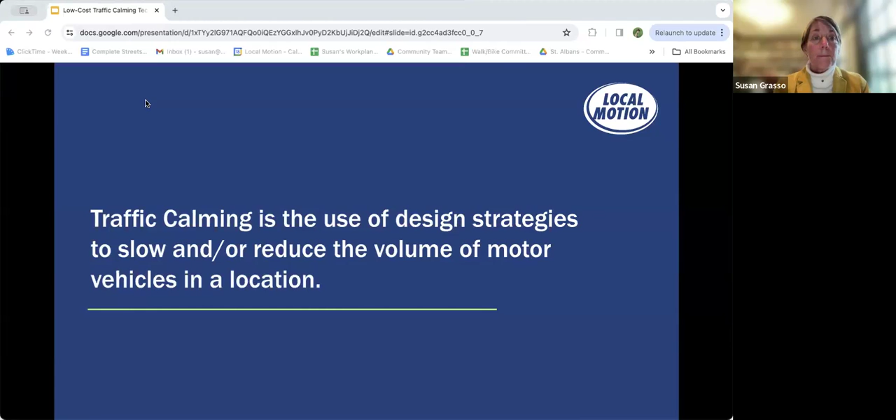So here's our definition of traffic calming. Traffic calming is the use of design strategies to slow and/or reduce the volume of motor vehicles in a location. When successful, traffic calming brings many benefits, which can include improved safety and quality of place, increased use of walking, biking, and rolling, greater economic activity, and reduced demand for enforcement.

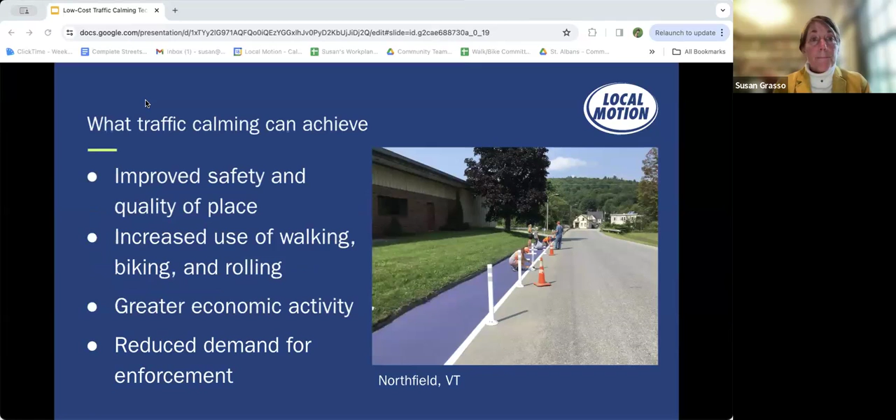The last word used in our definition was location. So where is traffic calming appropriate? Essentially, it's appropriate anywhere that the current design of the street or road is inducing drivers to go faster than is appropriate for the context.

So common points where traffic calming is needed are transition zones between rural and urban areas, or transitions between rural areas and village centers. Also within village centers, around schools, on neighborhood streets, on rural roads used by people walking and biking, and at crosswalks and intersections. Now that we've established what traffic calming is and what it can achieve, we're going to learn more about the things we're trying to change, which is driver behavior and speed.

So I think a major point of this webinar is don't blame the human, blame the design. The speed at which people drive is mostly determined by cues that we take from the roadway and the surrounding context. That includes things like the width of the road overall and the lane widths, how close buildings and trees are to the road, how intersections are designed, and more. Generally, straight and wide designs send drivers signals that high speeds are okay, while narrow, more constricted designs will signal to drivers that they need to go slower.

So no doubt about it, there are reckless drivers. But when most drivers are going above the speed limit, that's not an indication that something is wrong with the humans driving. It's an indication that the design of the road is giving those drivers cues that are not aligned with the surrounding context and how fast we want cars going. Education and public service announcements have a very limited real effect in and of themselves.

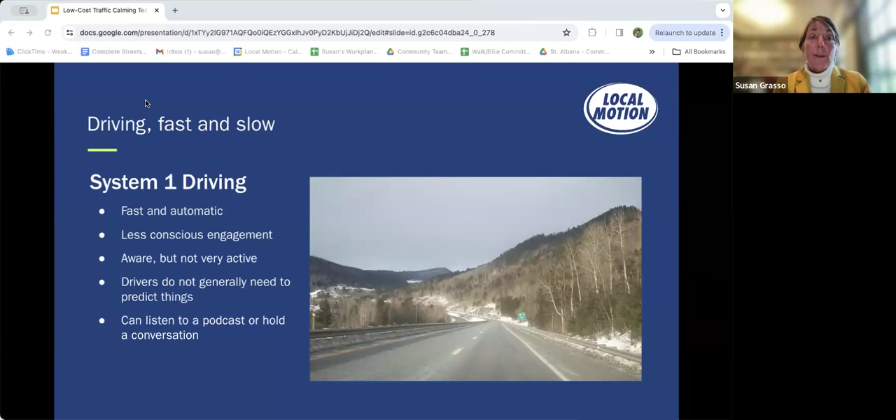So we can think about driving as toggling between these two systems. When it comes to driving, which system we are in is largely determined by our perception of risk. In simplified contexts, like a highway, motorists are more likely to perceive less risk and apply system 1 thinking to their driving decisions. In this context, we can have a good conversation with someone else in the car, we can listen to a podcast, etc. Our body and mind are performing the operation of driving in a relatively subconscious way, and so we can do other things at the same time. This is generally safe when we're in a simplified environment where we don't need to do things like predict what other road users are going to do.

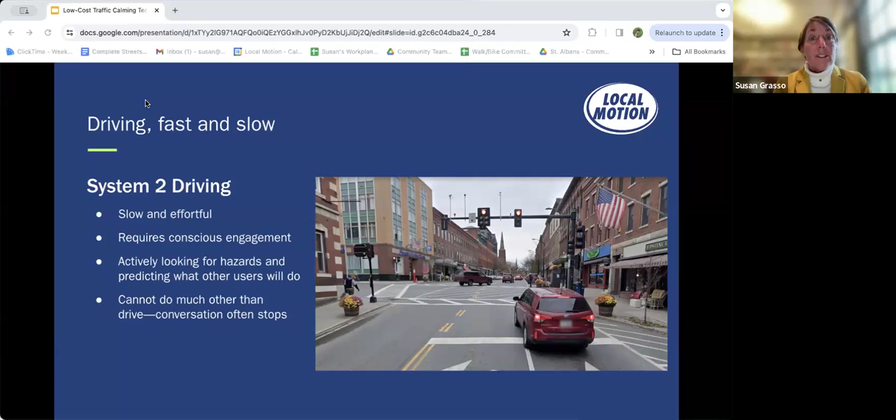System 2 driving is engaged when we perceive a higher level of risk in our environment. This engages drivers in a more slow and effortful mode of operation, in which they are more actively looking for hazards and predicting what others might do. So in this mode, you usually can't do much more than drive. Conversation will often stop. You might turn down the music or podcast to focus on driving. You become more focused.

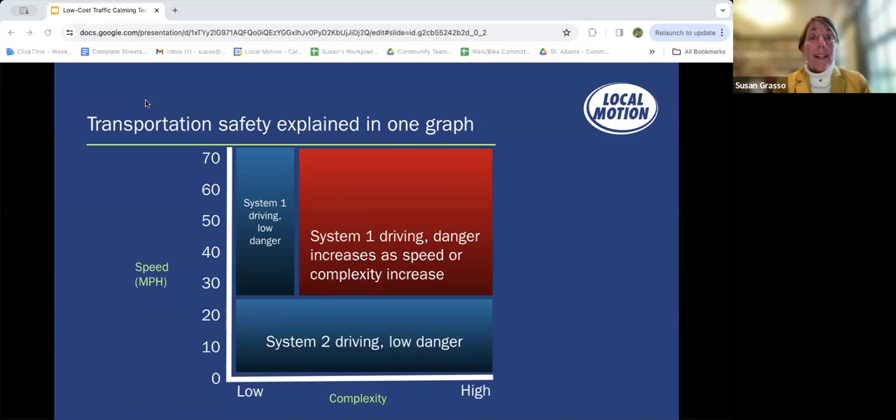So this graph applies system 1 and system 2 driving to give us a framework through which we can understand the interaction between car speeds and the surrounding environment and how this contributes to danger or safety. Speed is on the y-axis. An environment in which cars are moving at a high speed is not necessarily dangerous in and of itself. Complexity is on the x-axis. An environment in which there's a great deal of complexity and unpredictability, like a parking lot or a downtown street, is also not necessarily dangerous in and of itself.

Roads are high-speed, low-complexity environments. The design of the road is simplified to make driving at higher speeds safer. There are few intersections, and at highway speeds, people outside of cars are usually not allowed. Drivers operate in System 1 in this kind of environment, and it's relatively safe.

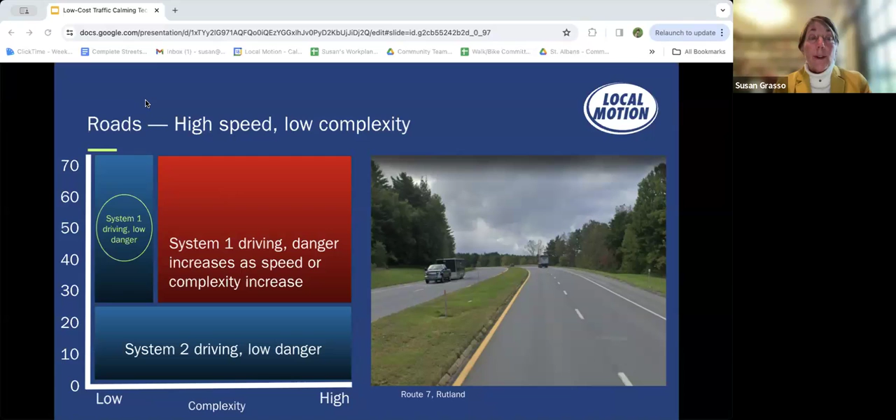Streets are platforms for a community to exist and create social and economic prosperity. This is an environment with a lot of complexity where people are crossing the street, trucks are stopping to make deliveries, maybe there's trash pickup happening. The design of a street signals to drivers that they need to pay attention and go slowly, which puts them into System 2. This again is relatively safe.

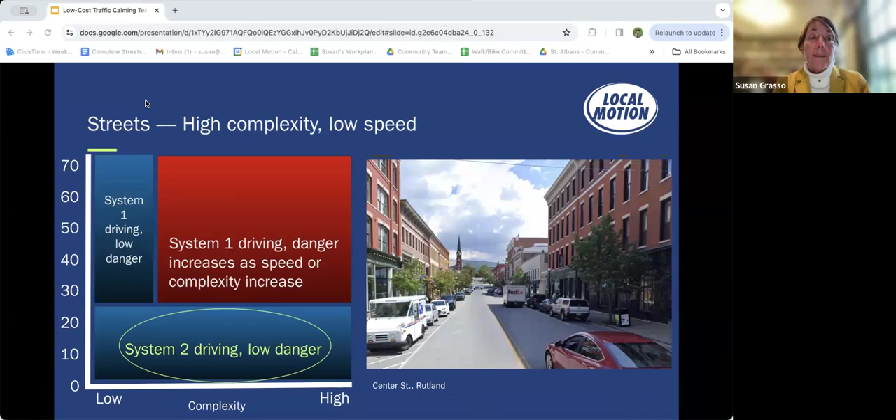A STROAD mixes design elements from both roads and streets. These areas are often wide and straight with many lanes. Development is usually set back from the road, and yet there's complexity resulting from the development, which requires driveways and intersections, and there are sometimes people walking and biking.

So in a STROAD environment, the road-esque design puts drivers into System 1 and encourages higher speeds, but the development introduces elements of complexity that result in danger when mixed with that speed. A STROAD does not have to be in a suburban area, and you can have sections or even intersections in downtowns or village centers that are more STROAD-like. These are often areas that require traffic calming.

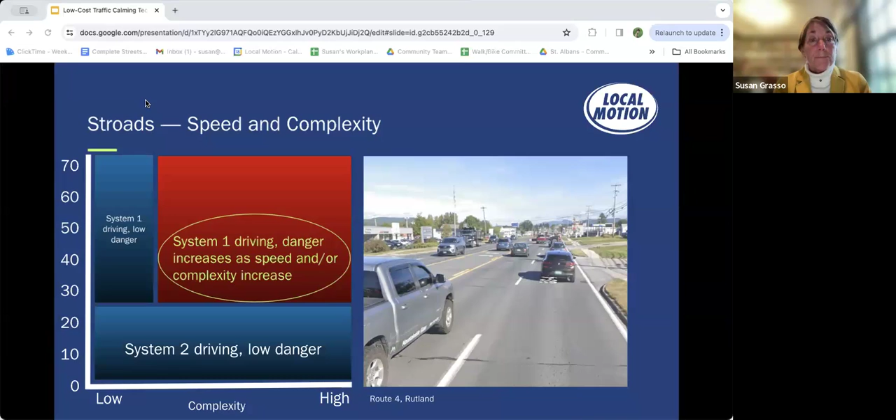So effective traffic calming is essentially about recognizing the points where the design of the roadway is cueing drivers to be in System 1, and then changing design factors to switch the drivers into System 2.

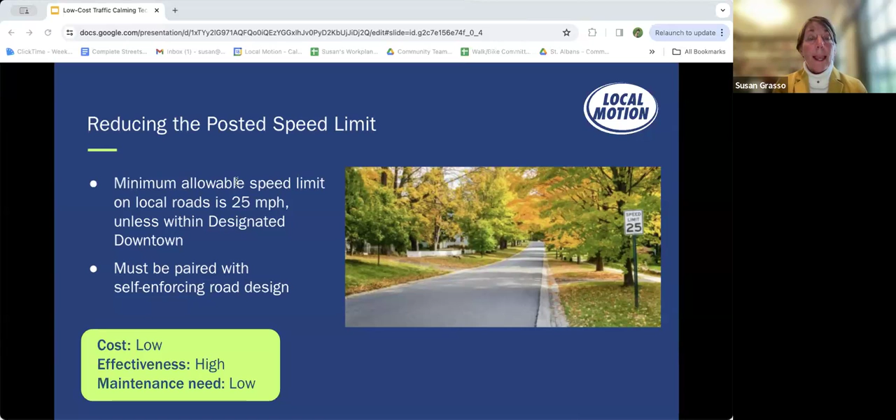So a speed feedback sign is like a speed limit sign, but on steroids. These signs have built-in technology to indicate to drivers how fast they're going, or in some cases, simply tell them that they're going too fast. So speed radar signs can be installed either as portable units or permanently placed. But either way, they're pretty expensive.

They are, though, very effective as they can reduce speeds between 5 to 7 miles per hour in the area near the sign. They do need a power source and regular maintenance to keep them in good working order. Plus, a potential downside is that motorists can become immune to them if they don't feel a risk of enforcement. So you might want to pair this treatment with some intermittent police presence.

Next up is a strategy known as centerline removal. So that ubiquitous double yellow line on our streets and roads may actually encourage people to drive faster. There hasn't been a lot of research done on this yet, but preliminary research indicates that in certain situations, removing the center line can reduce traffic speed. Speed reductions between 5 to 7 miles per hour are possible.

The explanation for the observed traffic calming effect is the addition of an element of uncertainty, which is thought to naturally reduce speeds. Drivers come upon a situation like that and are sort of surprised not to have that double yellow line present, which causes them to pay more attention and slow down. With striping, motorists feel more confident about where their space is, triggering that system one, more automatic pilot driving style, which again manifests itself in increased speeds.

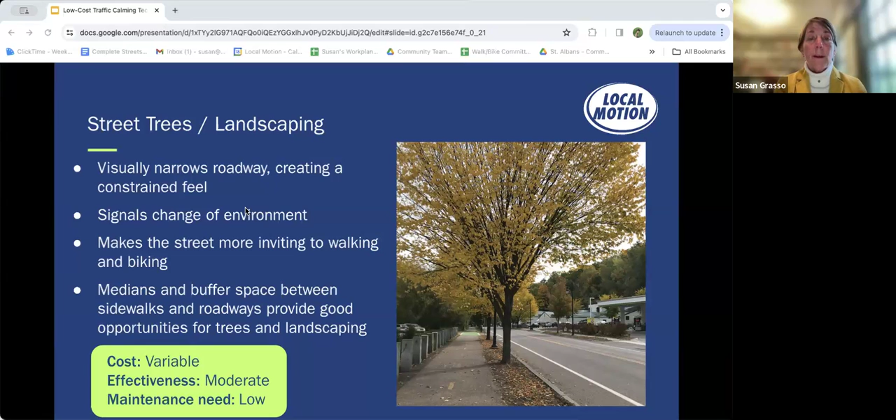Not much is known about how effective this strategy is for traffic calming alone. It's usually recommended to be a part of a more comprehensive traffic calming program. The example shown here is from Burlington on Riverside Avenue.

Next up, we have edge lane roads. These are also called advisory shoulders or advisory lanes. With an edge lane road, the car lanes are combined into a shared center lane, ranging from as little as 10 feet up to about 18 feet in width. This creates usable shoulders for people walking and biking on roads that would otherwise be too narrow to accommodate that use. When drivers encounter each other, they shift into the edge lanes to pass as needed. And if people are walking or biking in the edge lane, drivers must yield to them. All of this contributes to a calmer and safer road that accommodates people driving, walking, and biking.

Edge lane roads are appropriate for low volume roads with low to moderate speeds up to about 35 miles per hour. While they're common in Europe, they're currently not approved for use in the United States, while the Federal Highway Administration evaluates safety data from an experimental study. We're hoping this treatment is approved for use soon because we see a lot of potential for this strategy on our rural roads here in Vermont.

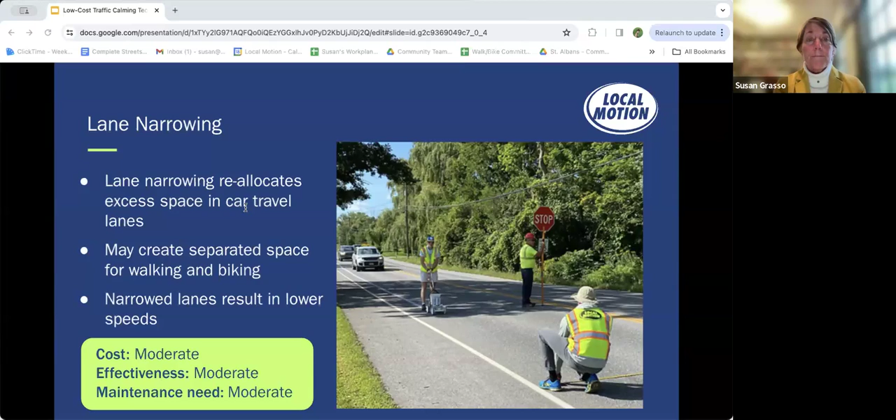So in contrast to lane narrowing, lane reduction is about reducing the actual number of car travel lanes on a multi-lane road. This treatment is often referred to as a road diet, most typically converting 4 travel lanes to 3, which provides a travel lane in each direction plus a center turn lane. The extra space no longer needed for the 4th lane can be used to create bike lanes or shoulders.

These 4 to 3 lane conversions have been shown to be very effective, reducing speeds by about 5 miles per hour and reducing crashes by something like 40 to 50%. They can also be relatively inexpensive if the conversion is accomplished using pavement markings within the existing public right-of-way. We also recommend that when these conversions are considered, that they be paired with lane narrowing to increase their effectiveness.

The need for turning lanes should also be given serious consideration based on all users of the road, not just motorists, because they create uncomfortable and unpleasant conditions for people at street crossings, including longer crossing distances and the loss of bike lanes approaching intersections. The occasional pauses that drivers must make to accommodate turning vehicles can create positive friction in traffic flow, helping to keep speeding in check. On streets where turning lanes are really necessary, it's important to ensure that intersections or mid-block crossings are designed with pedestrian safety and comfort enhancements, which we're going to talk about in the next section.

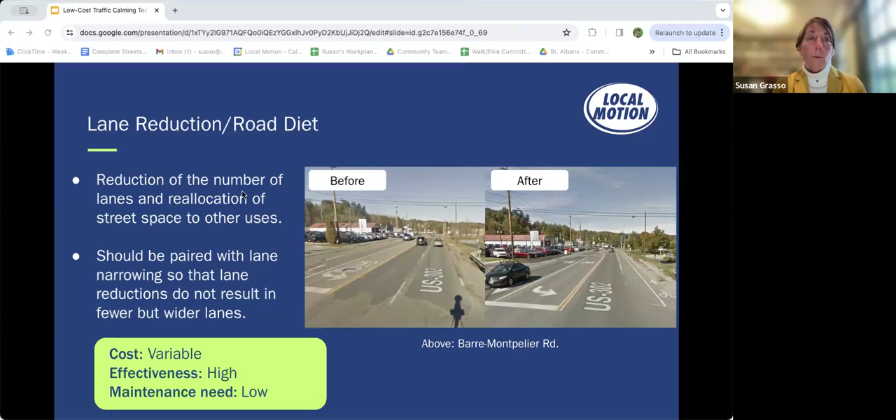So in the next couple of slides, we're going to look at treatments that involve the shoulder space. Bike lanes can help calm traffic when they're coupled with a reduction in lane widths or number of lanes for motor vehicles. And the presence of people in the bike lane also helps to slow traffic. So there's a safety in numbers effect at play here as well.

Protected bike lanes provide additional separation between people biking and driving, often by using delineator posts or concrete curbing. These types of bike lanes are more likely to slow traffic because of the presence of physical barriers alongside the travel lane. Reductions of speed from 8 to 16% can be expected depending on the application. Bike lane width should be about 5 feet or even 6 feet to appeal to all ages and abilities, with a preferred buffer width of 3 feet or more for vertical protection.

The cost to create a protected bike lane is much less than the cost to create an off-road shared use path, and much easier if it is placed in the public right-of-way, but it can still be pricey if the length of the corridor is very long. In addition, there are maintenance concerns that have to be addressed for protected bike lanes. Delineator posts are often removed to allow for easier winter plowing, and where protection is provided year-round, accommodations need to be made to ensure that the bike lane is plowed in the winter and otherwise swept clean of debris, and this could require the use of special equipment.

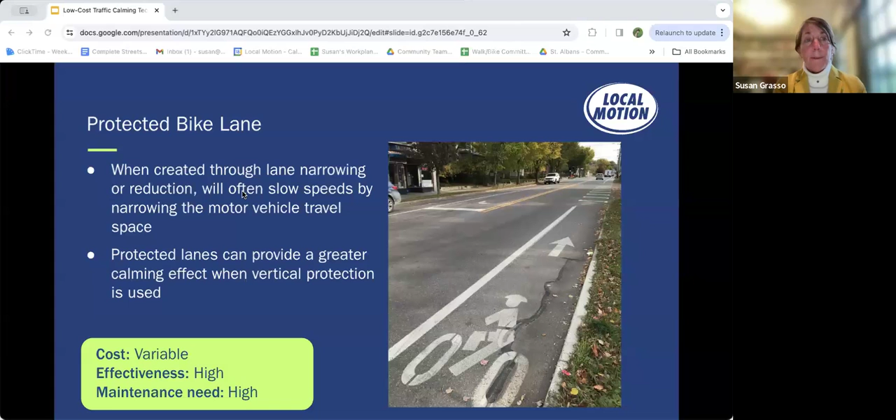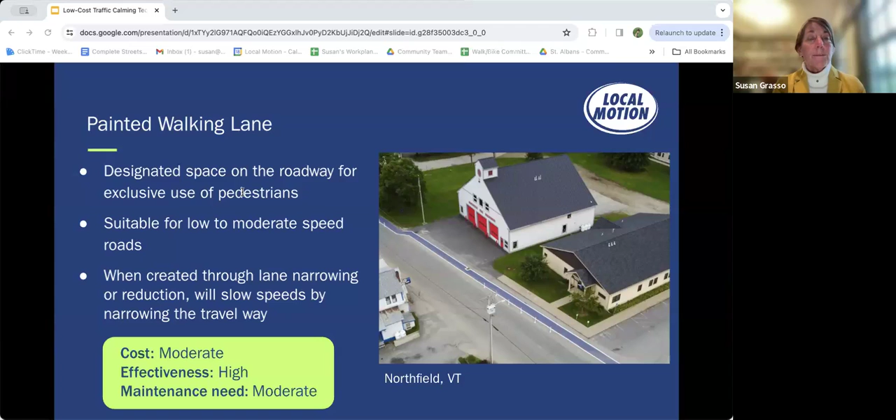Shoulder widening is often considered in rural areas as a way to make space for people walking and biking in an otherwise too narrow roadway. This requires the addition of new pavement at the sides of the road to create a wider overall cross-section, as opposed to lane narrowing, which repurposes existing pavement to create wider shoulders for walking and biking. In Vermont, paved road shoulders are considered bike lanes, even if unmarked, and they can also be used by pedestrians if sidewalks are not present.

Rumble strips and/or contrasting or colored pavement materials along especially dangerous sections of the road could be considered with shoulder widening to reduce the risk of roadway departure of motor vehicles. The downside to shoulder widening is that because the roadway is getting wider overall, it can result in higher speeds. So that's a trade-off, but sometimes, creating that separated space for walking and biking is worth that trade-off.

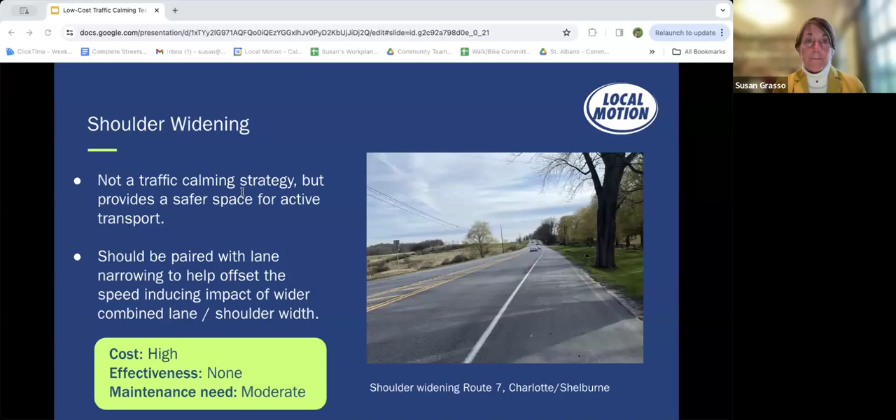Next up are side paths. These are two-way protected bike lanes on one side of the road that create a bidirectional shared use path. Side paths can offer a very low stress experience as compared to traditional bike lanes because they usually provide for more separation and protection. This treatment also very efficiently uses space because it requires only one buffer, which also helps to reduce the cost. It's especially cost effective if a side path can be created on existing pavement.

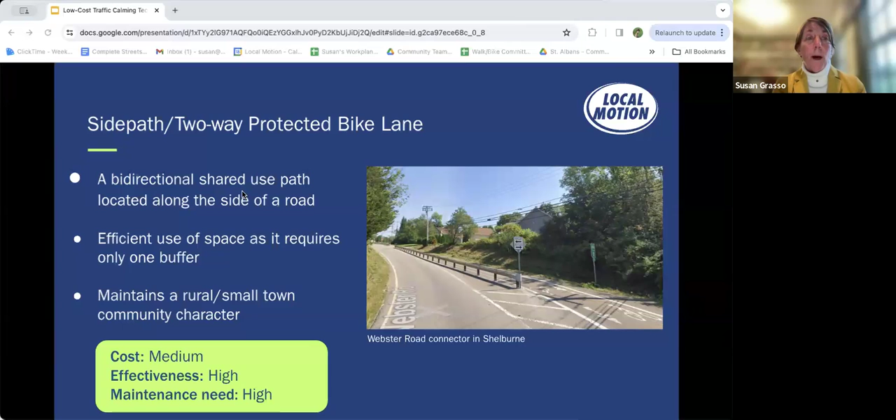So speed tables are asphalt or rubber mounds with flattened tops that cover the full width of the roadway. The flat top is typically long enough for the entire wheelbase of a passenger car to rest on, so they're quite different from speed humps or bumps. Raised crosswalks are similar, except that they are placed at pedestrian crossings, simultaneously slowing speeds and allowing pedestrians to be more easily seen. Speed tables should be considered more of a corridor treatment and raised crosswalks more of an intersection treatment, but we've combined them here because of their similar design and impact on speed.

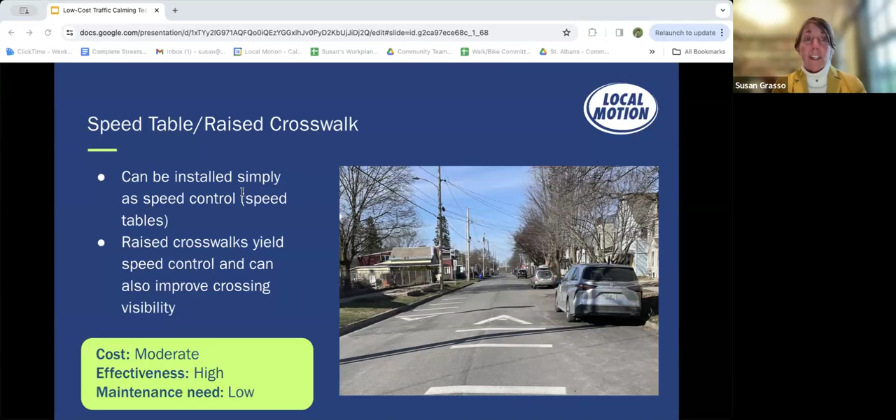Both treatments slow vehicles down because they vertically displace them, and they are both quite effective with speed reductions of up to 10 miles per hour possible. Speed tables and raised crosswalks are commonly preferred over speed humps because they are less disruptive to motor vehicles, especially emergency vehicles.

So next up are community gateways. These are landscaped sign installations that announce to motorists that they're leaving a rural area and entering a community where land use, pedestrian use, and motor vehicle activities will be more intense. Gateway signs should be placed in areas where a reduction in speed is desired. Some data suggests that average speed reductions of about 5 miles per hour can be associated with this treatment. Gateway signs also can align with community development goals to highlight a sense of place.

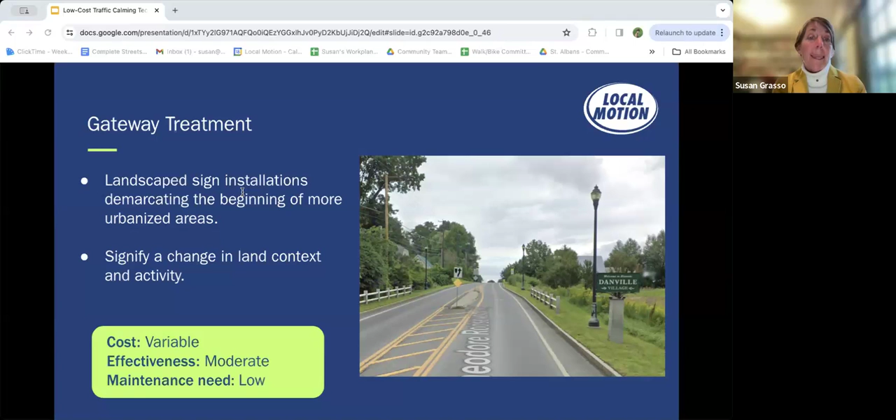The example shown here is from Danville. In this case, the gateway treatment is combined with other vertical elements like the light post and fencing and lane narrowing by pavement markings to cue the driver that the road context is changing and that they're entering a settlement of some kind. The cost of this treatment varies greatly depending on how involved the gateway design is and the extent to which other complementary elements are included. Maintenance needs include keeping the sign in good repair and keeping up with associated landscaping and mowing.

And next we have chicanes. Chicanes are designed to convert straight segments of roadway into curved ones by essentially creating staggered curb extensions. They can be installed using curbing or landscaping. They can also be created by alternating parking from side to side, or even by alternating parallel parking and perpendicular parking. Chicanes can be effective at reducing speeds by about 2.5 to 6 miles per hour.

They might be appropriate for some rural main streets, but if there's a high percentage of truck traffic, curb overtopping could be a problem, so that would have to be considered. Communities could also think about installing seasonal chicanes to reduce the maintenance effort associated with winter snow removal. You probably noticed that we've been sharing local examples of the strategies included in this webinar. Jonathan and I are not aware of this treatment strategy having been applied anywhere in Vermont. So if you know of an example of a chicane, we would love to hear about it.

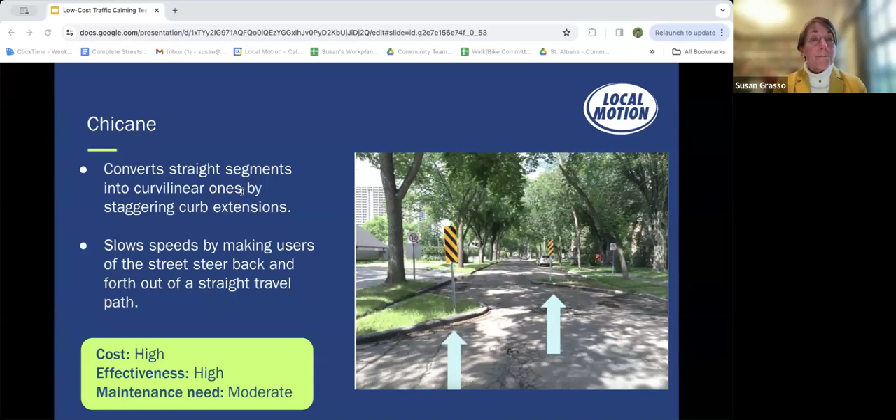So up until now, we've been talking mostly about strategies to reduce speed, but slow-moving traffic at high enough volumes can still create conditions that are uncomfortable and unattractive for riding bikes in mixed traffic. So it's important to think about whether traffic volumes need to be managed too. Using modal filters to create filtered permeability does just that. Filtered permeability is the idea that you can filter out cut-through car traffic on selected streets to create a more attractive environment for walking and biking while maintaining accessibility for residents, deliveries, trash collection, or emergencies. Modal filters are the different ways that you can do that.

When properly applied, this is a great way to provide on-road, low-stress conditions for people walking and biking with no impediments. The potential downside is that it may lead to higher traffic volumes on other roads. This highlights the need for thinking about the road network holistically for all modes of transportation and understanding the purpose of the various roads in your community as you think about effective design changes. Modal filters can be as simple as a barricade sign to gates, bollards, planters, curbs, concrete blocks. Bollards can even be flexible and bend on impact with a motor vehicle, which can allow emergency access.

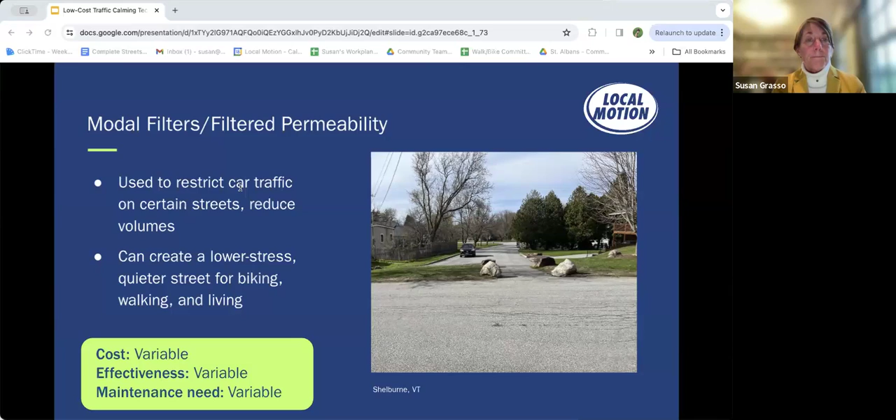In this example, also from Shelburne, large boulders and grass were used to prevent traffic from Shelburne Farms cutting through this neighborhood to access Route 7. People can easily continue to use these residential streets for walking and biking. So that was a mouthful. We're going to pause here for some questions before we move on to treatments for intersections and crossings.

Okay, so Michael, I think there are plans to install chicanes on the Notch this year. That would be awesome. We'll be sure to track that. The new parking design on Archibald Street in Burlington is a kind of chicane. Okay, I'm not familiar with that, but we'll look into that as well.

Thank you. When will Vermont decide if the edge lane was effective and allow it to continue? It's my understanding that the edge lanes were removed from Lincoln, and I'm drawing a blank on the second community where it was tested, but it is still in existence in Burlington. As far as I know, there are no plans to remove it. And I think before we really encourage that strategy to be adopted widely, we're going to have to wait for the Federal Highway Administration to give their approval for that. I hope that answers your question, Christy. Yes, and Lincoln. Yeah, Christy, please share a comment about what you thought about the edge lanes in Lincoln if you had a chance to experience them. Thanks, Paul, for your comment.

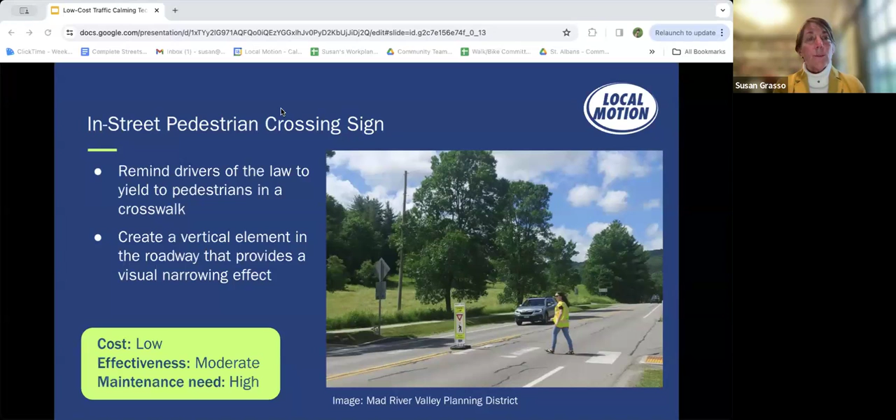So pavement materials. Textured surfaces include the use of materials like brick pavers, cobblestones, or textured concrete to cue motorists that they're in a more people-oriented place that has the potential for pedestrian activity. They're often used in conjunction with other traffic calming elements. So in addition to their visual quality, textured pavements can also generate noise and a physical sensation, causing drivers to slow down. Some studies suggest that speed reductions of up to 9 miles per hour are possible when applying surface treatments like these.

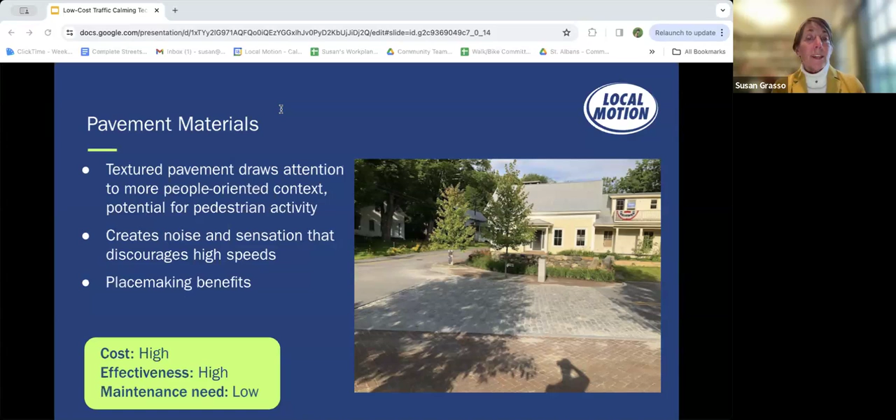In this example shown here from Warren, recovery funds from Hurricane Irene were used to both improve Warren's sense of place and calm traffic using a combination of brick pavers, gray cobblestone, granite curbing and bollards, and landscaping. One consideration with this strategy is how the choice of pavement materials affect comfort, safety, and visibility for people on bikes or people who are using mobility assistance devices. So textured surfaces might be better kept to smaller sections or combined with smoother, more visible surface treatments.

Street art is similar to use of textured pavements, except that the road surface is painted to draw attention to the fact that something about the roadway is changing. It's also used to both encourage slower speeds and create a sense of place. Street art is often placed at the center of an intersection, but it can also be located in other sections of the street and mid-block locations. Federal guidelines require that designs do not copy, hide, or otherwise interfere with traffic control devices. Installing street art is usually not very expensive, and it can be moderately effective in slowing traffic. However, plans should be made to maintain the street art or permanently remove it when it begins to fade to prevent it from becoming an eyesore.

Curb extensions, also called bump outs or bulb outs, extend the sidewalk into the roadway to shorten the crossing distance of the road. Car parking close to crosswalks can create hazards by obscuring the sight line between drivers and people about to cross. So curb extensions can help to address this by shifting the parking away from the crosswalk.

Curb extensions have been found to reduce speeds by about 2.5 miles per hour, but they're very effective at increasing the comfort people feel when walking because of the shortened crossing distances. They can be expensive, however, due to the cost of relocating curbs, but you can use painted curb extensions or temporary materials like planters, rocks, and flex posts to create these.

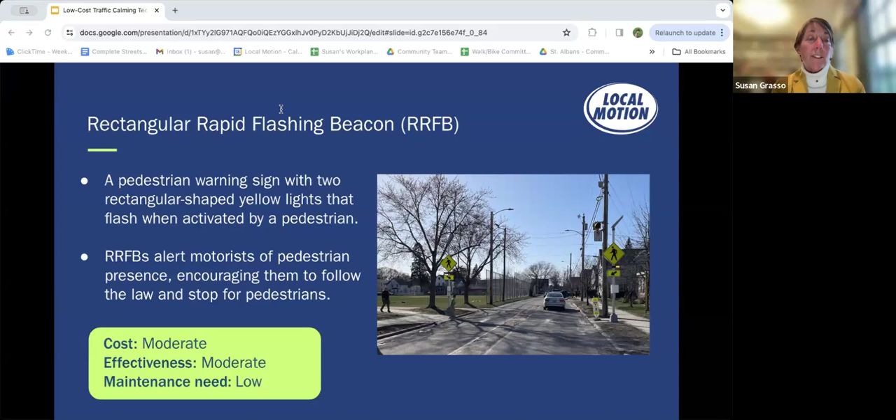Yielding rates up to 98% have been observed, as well as a 47% reduction in crashes involving pedestrians. But this, again, will vary depending on the location, posted speed limit, number of travel lanes, pedestrian crossing distance, and other things. RRFBs cost on the order of $15,000 to $20,000 and they do need a power source and regular inspection to ensure reliable operation.

So a pedestrian island is a median with a refuge area that is intended to help protect pedestrians who are crossing a road. They usually narrow the travel lane at the roadway center line and separate opposing traffic movements. Like bump outs, a pedestrian safety island reduces the exposure time experienced by a person crossing the street. This becomes increasingly important as the number of travel lanes increases because pedestrians feel more exposed and less safe as the width of the crossing increases.

The island also enables a person crossing to only monitor oncoming traffic on one side of the island at a time, as opposed to needing to wait for a gap for all lanes of traffic to yield. Pedestrian islands are a more expensive treatment because they involve the construction of new curbing, but they can reduce crashes by 56%.

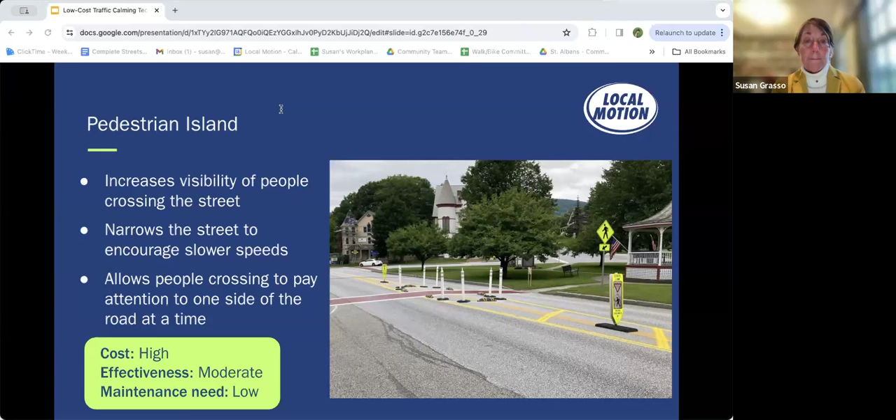Traffic circles are also called mini circles or mini roundabouts. They're raised islands in the center of an unsignalized intersection. They typically replace the use of 2- or 4-way stop signs. Where regular traffic circles can easily be over 100 feet in diameter, mini circles are typically on the order of 10 feet in diameter. And the way they work to calm traffic is that they physically force traffic to slow as cars navigate the curve through or around the intersection.